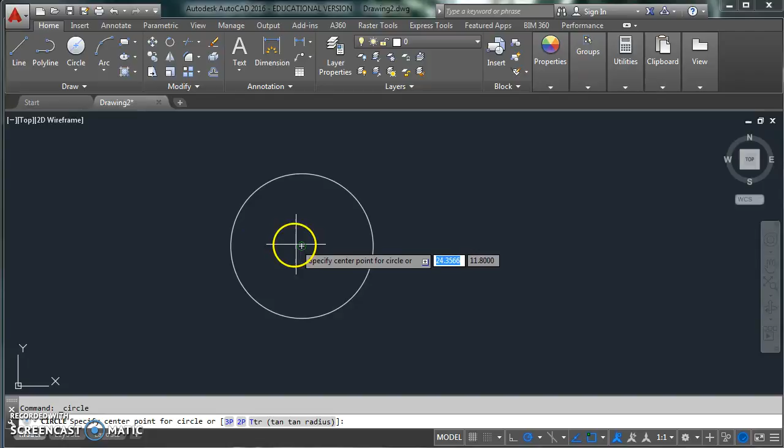You're going to need another circle at the same center point, 11.25 diameter. Make sure those are diameters, not radiuses. You can always double click on it and check, and it'll give you the actual feedback of what size the circle is. You can also change it right there if it happens to be wrong.

I'm going to draw a line, and I'm going to hover on the circle until that quadrant appears. So the quadrant object snap needs to be turned on. I'm going to go above it, and I'm going to drag it below, so I have a single line that's actually larger and smaller than both circles.

Your object snap settings are right here, by the way, so you can turn on quadrant right there. There's your others that should be turned on.

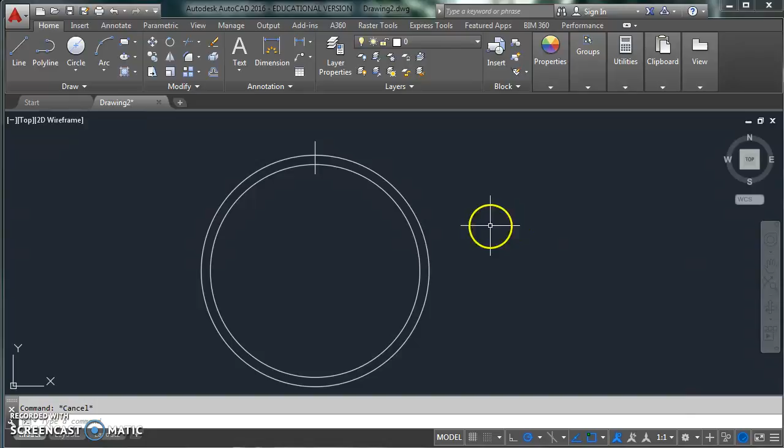I'm going to use offset, either the letter O or this button right here. The offset distance that the book gives you is 0.1875, 3/16 of an inch. Hit enter, click the line, click left, click the line, click right. So you should have 3 lines on there now.

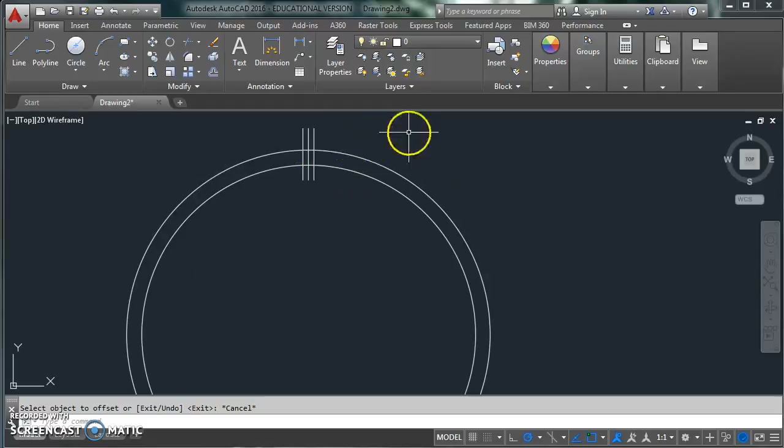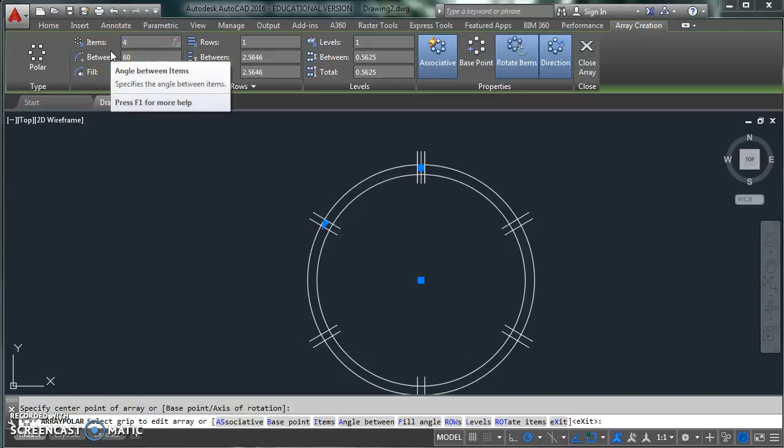I'm going to do a polar array, so I'll click these 2 lines, hit enter. It asks for the center point, and I want to pick the center of the circle. There are 48 teeth on that gear, so I'm going to count them. I count them up in the book. There's 48 of them. I'm going to close the array, and then it looks like that.

Now we need to do some trimming, so I'm going to click the trim command, or type TR for trim. I'm going to select everything, hit enter once, and then I'm going to get in there and start trimming off.

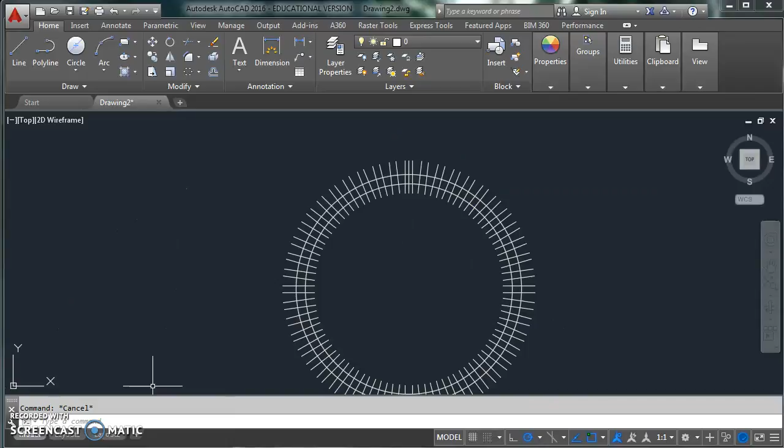Whoops, I made a whoopsie. When you make an array, it's all one item, so it won't let me trim it. So to fix that, I have to explode the array. Hit explode, click the array, and then hit enter, and now we can do the trim. So nice little whoopsie there for you.

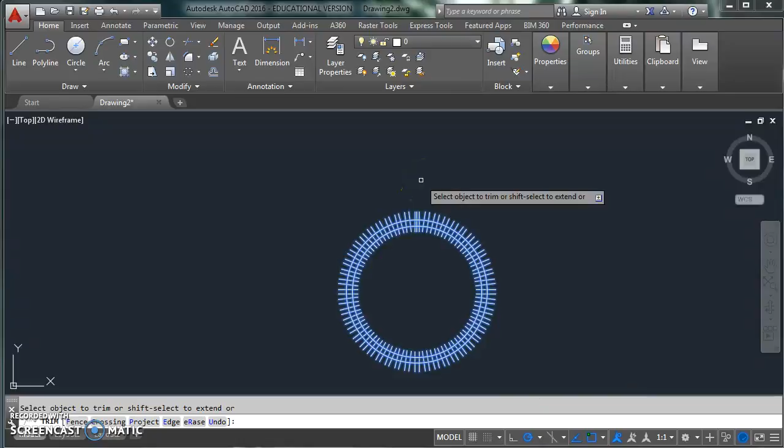So select everything, hit enter. We're in trim again, and now I can trim away what I don't need.

You're going to start to see the pattern, and it's going to take a while. You're just going to have to work your way around. Start seeing the pattern, and you can go. I wouldn't go too far, but I'd go a little ways before you zoom again.

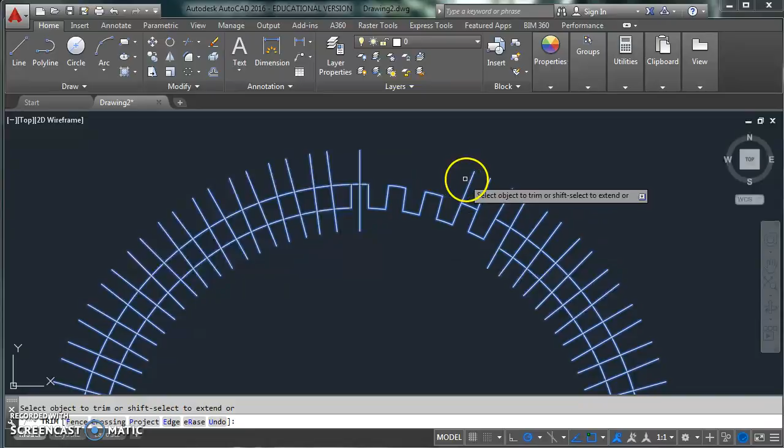I'm going to pause it and skip ahead. Okay, now that I got that trimming done, I can move on to the next step.

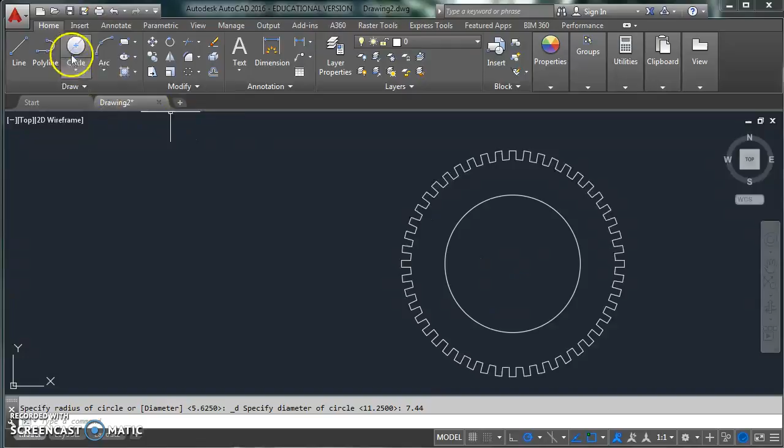I'm going to go back and make another circle with a diameter from the middle of that, and the circle diameter is 7.44. I need another one, and this time it is from the same spot, and it is 3.25 diameter. So once I have those 2 circles, then I can go ahead and draw a line from the center.

I'm going to go straight up and stop when I hit the quadrant. I'm going to do a rotate, click that command, click that line, hit enter. I'm going to pick the base point as the middle of the circle. I'm going to rotate it to the left 20 degrees. So if I just type in 20, enter, it goes ahead and rotates that line 20 degrees to the left.

I'm going to draw another line from the same spot straight up to that quadrant. I'm going to rotate that one, and this time I'm going to pivot at the same spot, and this time I want it to go the other way. So instead of 20 degrees, I'm going to type -20, and that's going to rotate it to the right.

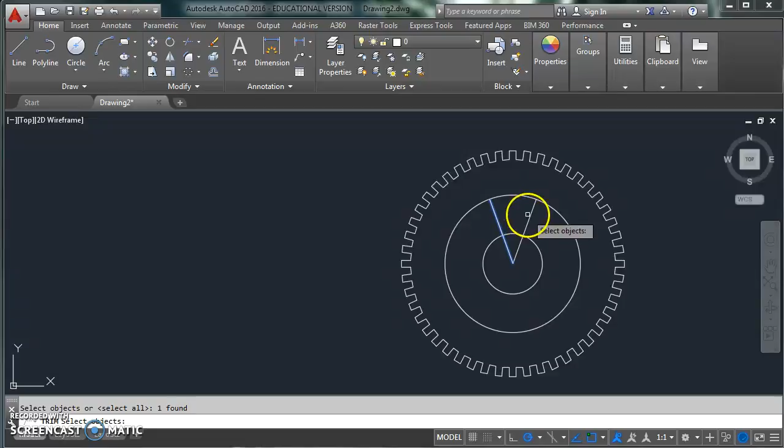So once I have those 2 in there, I can go ahead and do a trim. Click the trim command again, click those 2 lines and those 2 circles. Then I'll hit enter once, and then I can remove the parts I don't need, which should look like that.

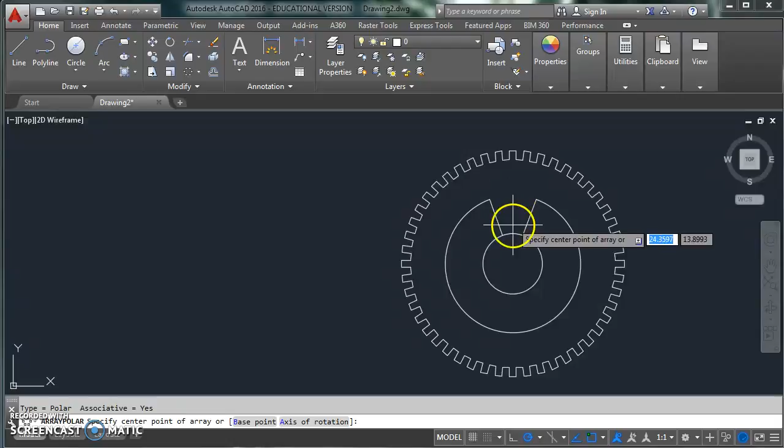Once you have that shape, you can go ahead and do another polar array. Click those 2 lines, hit enter. Center point of the array is the center of the circle. I'm going to put 4 items, hit close array, and now it has made our hub, our cutout for the shaft, spline shaft to fit in there.

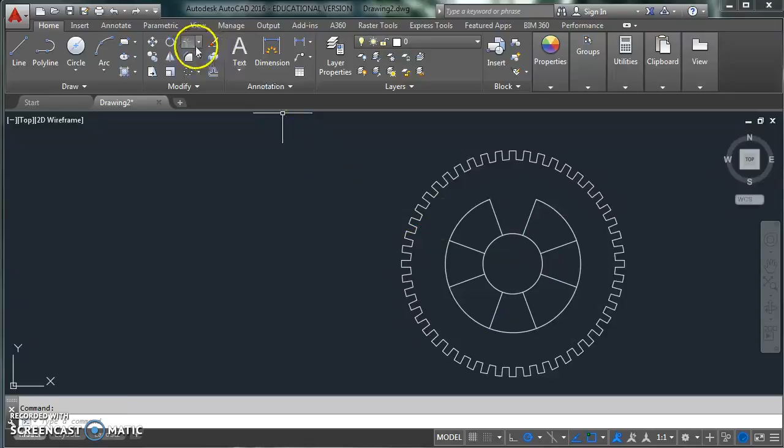So I'm going to go ahead and explode that, hit enter. I'm going to hit trim, and I'm going to pick both circles and every one of these lines. Then I'm going to hit enter.

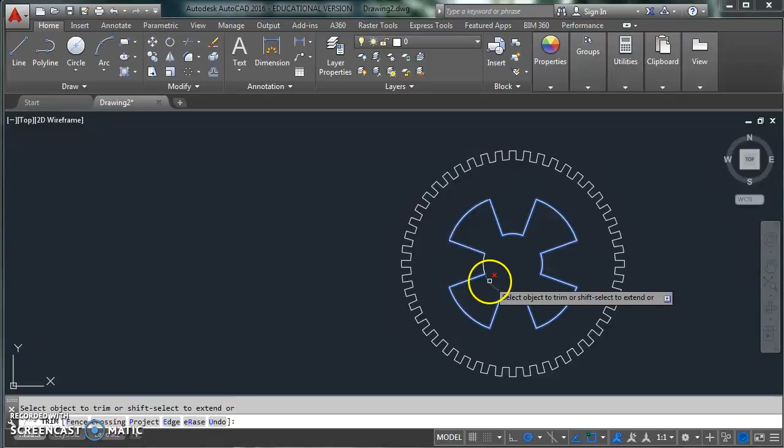Then I'm going to just follow it and click out the bottom one. I'm going to click out the right side, then the left side. Then you can see, oh, I need to click out the bottom of each tooth, like that. Okay, so that's the cutout part of it.

Now we need to add holes, and if you look at it, you can notice that they're spaced kind of similar. If we put a couple extra holes in there, we can make them all at once and then just delete the ones we don't want.

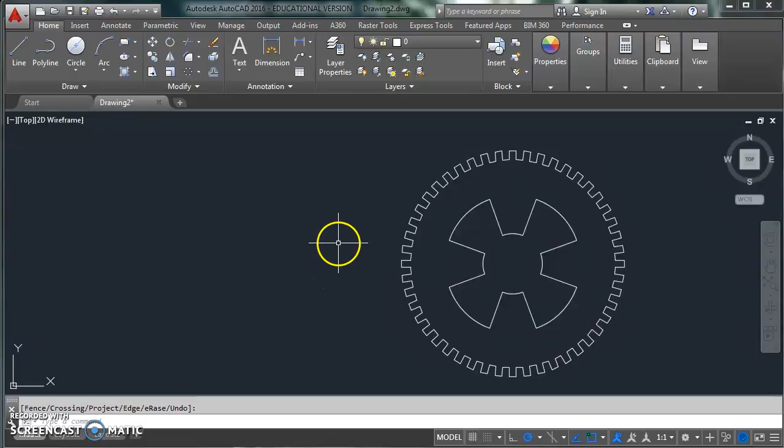So what I'm going to do is, I notice that the base circle is 10 1/4. So if I draw a line from the center point, half of that 10 1/4, which would be 5.125, 5 1/8, put a circle on the end of that, which is a 0.75 diameter.

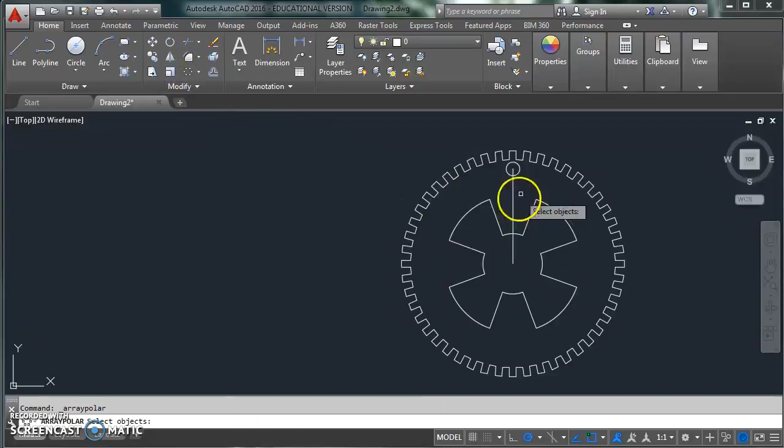Then I'm going to do a polar array with those circles. Click that, hit enter. Center point is again the same, the center. There'll be 12 of them this time. And I'm going to close it.

And now it looks like they're spaced right, but I have a couple extra holes, so all I have to do is explode that array. And now simply click the things I don't want, which is these 4 holes here. And that line I don't need anymore, I can just hit delete on the keyboard. That is your completed gear.